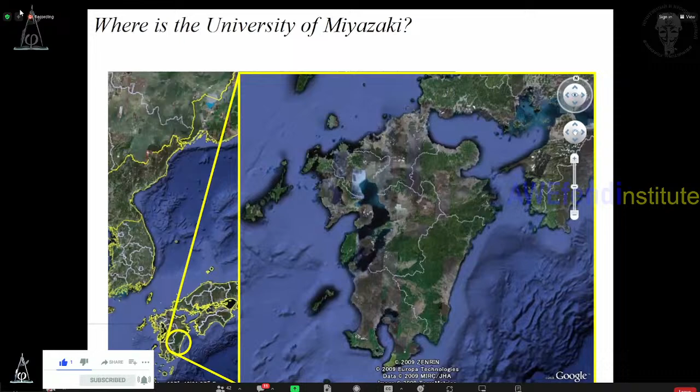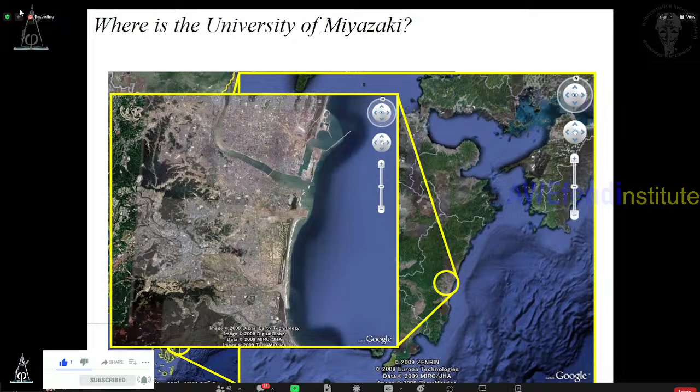I want to introduce the location of my university. Where is the University of Miyazaki? This is the Japanese islands. There is the main island, including Tokyo, and Hokkaido, the northern part of Japan. Miyazaki is on the southern island, Kyushu Island, here. There are some prefectures, and my university is located in Miyazaki prefecture, just here.

This is an aerial photo of my campus, around 10 kilometers from the city area, surrounded by nature. A very nice and comfortable campus. If you have the chance to visit Japan, please come to Miyazaki and enjoy the very nice environment.

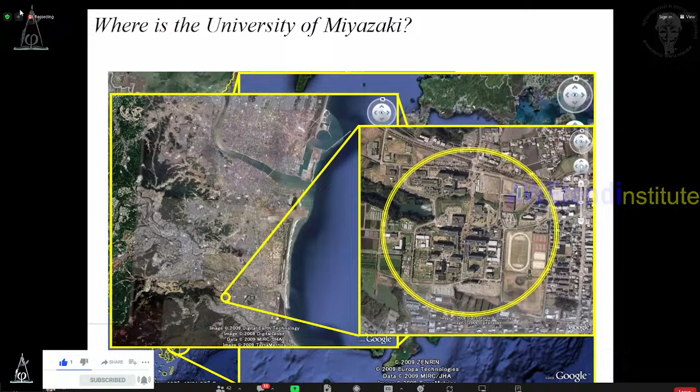Of course, many students from other universities and international universities studied in these courses. Many students from Brawijaya also studied in those courses. This is the outline of my university. If you are interested, please contact me or Dr. Nico.

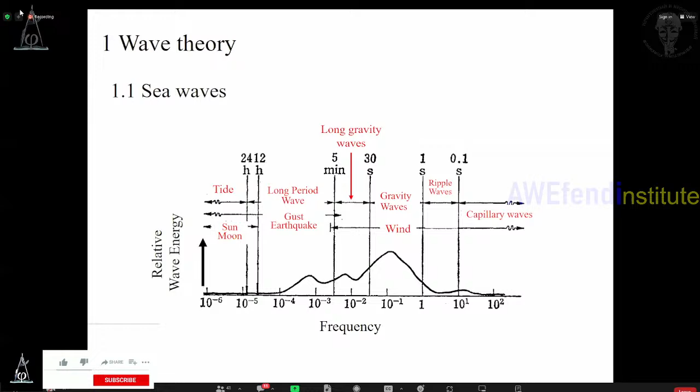Okay, before talking about the wave theory, I will show you the definition of the symbols I use in today's lecture. Sometimes I use capital H here - this is what we call wave height. And eta, this is the temporal water surface location. Capital L is the wavelength, and h is the water depth.

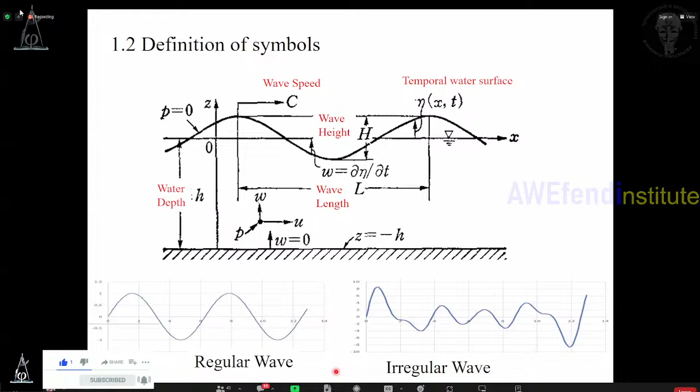Okay, at the beginning of the theory, there are some assumptions. Today I will talk about linear wave theory, and this theory includes some assumptions. One is two-dimensional phenomenon. Second is small amplitude oscillation. Third, and this is important, irrotational motion. And no viscosity and incompressible flow. The theory is based on a sinusoidal waveform, and the sea bottom is flat and impermeable. Another important assumption is constant atmospheric pressure, waves propagate without changing their form, and we neglect Coriolis force.

So, introduction of velocity potential is based on the assumption of irrotational motion. On the next slide I will talk about more detail. In this theory, we introduce the concept of velocity potential. U and W are the velocities in the X direction and Z direction. These velocities are derived from the velocity potential phi, differentiated by X or Z. This is the definition and introduction of the velocity potential.

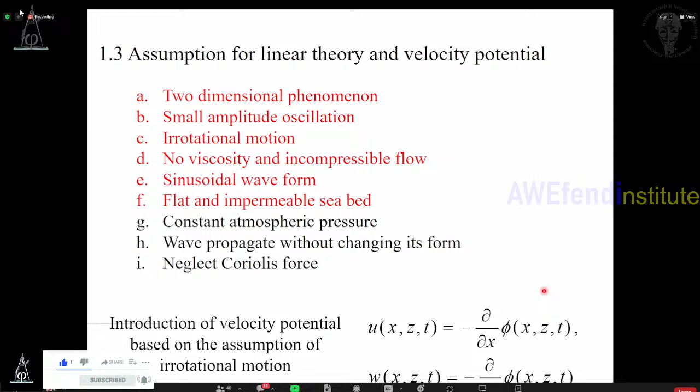Okay, then next I will talk about what's the meaning of irrotational motion. This is an image of the water particle rotation. This blue, green colored water particle is just rotating like this, clockwise rotation. This kind of rotation is generated by the flow velocity on the left-hand side and right-hand side here. The left-hand side is larger than the right-hand side, so this water particle has a clockwise rotation.

So we try to take the difference of velocity on the left-hand side and right-hand side, like this, and take a limit as delta x gets smaller and approaches zero. So we can have the derivative of w by x. We try the same thing in the horizontal direction - here is u, upper side u and lower side u. The upper side u is faster than the lower side, so the water particle rotates in the clockwise direction.

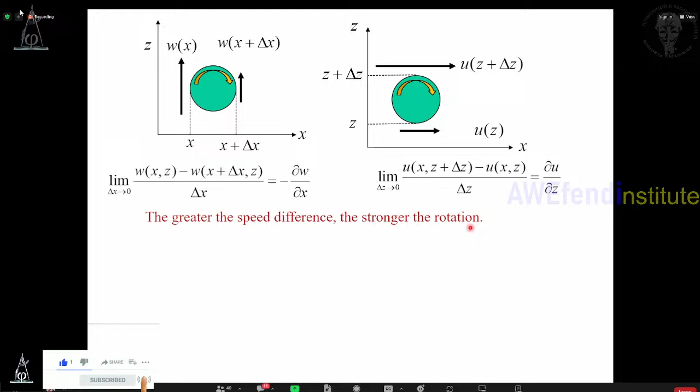So the greater the speed difference, the stronger the rotation. This is an image of the water particle rotation. That is why vorticity, the strength of the water particle rotation, the degree of strength that causes fluid particles to rotate, is the definition of vorticity.

From this definition, we can derive the vorticity like this one. Counterclockwise this part and this part. This is the vorticity. If we assume irrotational motion, this vorticity equals 0. No vorticity - this is the definition of irrotational motion. In wave theory, we use this assumption.

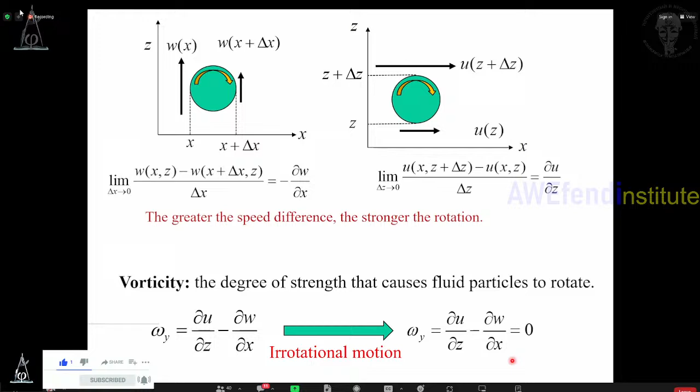Okay, maybe you can understand this one. Let's derive the following relational expression. I'll show you the previous slide.

Take the difference of z-direction velocities and divide it by delta x, and take the limit as delta x goes to 0. So this is the result of this definition.

But how can you get this relation? Can you derive from the left-hand side to the right-hand side? Can you do that? Please try this one. Maybe you can easily derive the right-hand side of this equation.

Okay, I will show you. You need to use Taylor expansion. Sorry, this is a mistake - Taylor expansion. Please correct this one, this is a mistake. On this equation, you can expand using Taylor expansion.

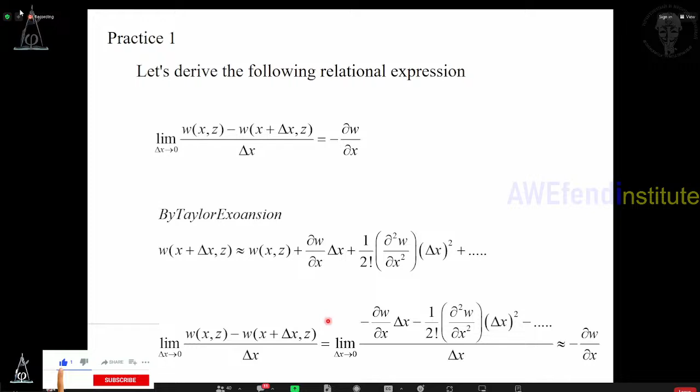Okay, next is the image of the velocity potential. This is the vorticity defined in the previous slide, and based on the assumption of irrotational motion, I showed you the result of the irrotational motion.

In this case, we introduce the velocity potential phi here and here. And when you derive the horizontal velocity, you differentiate phi by x, and also you derive the vertical direction velocity by differentiating phi by z.

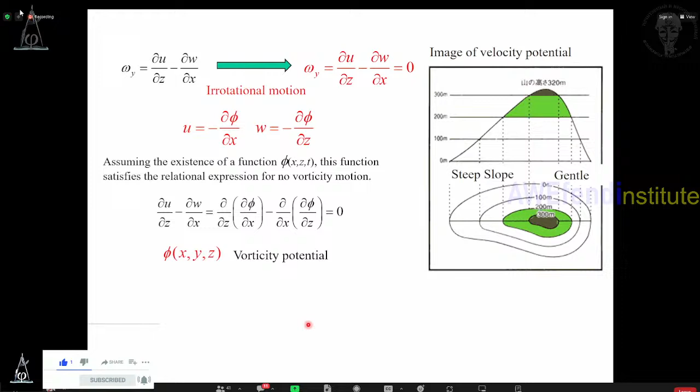If you can introduce this kind of velocity potential, we can satisfy this irrotational motion like this one. So you put this part in here and this part in here, and you can have this vorticity equal to 0. This is the image of the introduction of the velocity potential.

The image is here - here is a mountain, and the height of the mountain is a kind of the intensity of the velocity potential. This part and this part mean the slope of the mountain, in the x direction or z direction. If you have a steep slope, the velocity becomes higher, and if you have a gentle slope, the velocity becomes lower. This is the image of the velocity potential.

And the advantages of introducing velocity potential - there are advantages when you talk about wave theory, because U and W can be expressed by the velocity potential phi. That is why you can reduce the number of unknowns to solve. If we don't introduce the velocity potential, we have to solve U, W, P - there are 3 unknown parameters.

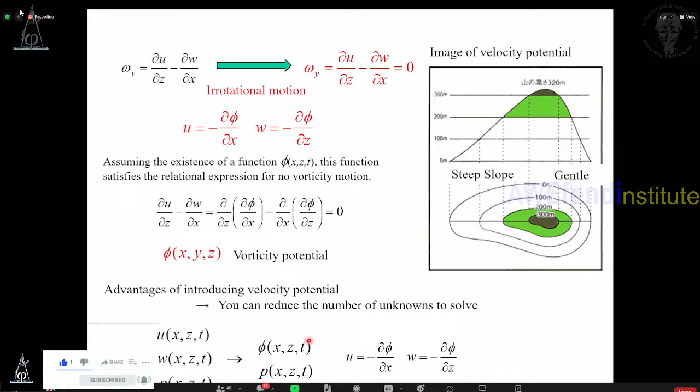Next, we try to talk about the governing equation. Maybe you already understand this one - the continuity equation. In fluid dynamics, this is a basic understanding, one of the governing equations. This is a small water particle, a small water compartment here, with dx, dz as the size of the compartment here.

Some amount of water goes into this compartment and some amount of water goes out from this compartment. Inflow from the left-hand side or lower side, and outflow from the upper side or right-hand side. The size of the compartment is dx and dz.

When you write the mass of water inflow, it is rho u dz, so outflow can be expressed using Taylor expansion like this one. In the vertical direction, the mass of inflow is rho w dx, so you will have the outflow like this one with Taylor expansion.

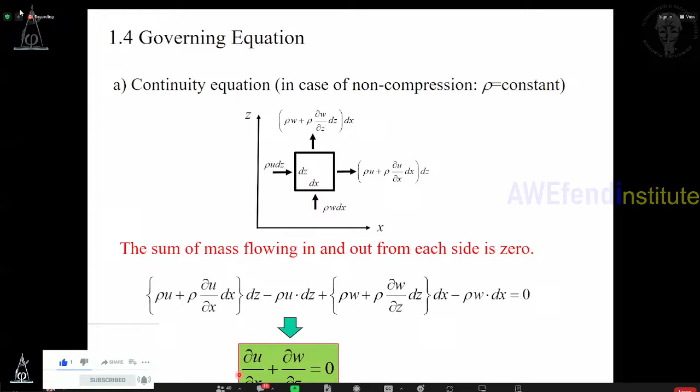Based on the concept of the continuity equation, the sum of the mass flowing in and flowing out from each side equals zero. This can be written as this equation: outflow, inflow, outflow, inflow, the sum of flow in and out equals zero. From this, you can have the continuity equation like this one. Maybe you already know this one.

Next is the momentum equation, what we call Euler's equation of motion. In our assumption, as I mentioned before, we cannot consider the tangential force tau. We neglect this force and only consider the pressure and gravity.

First, we understand the external forces acting on the fluid element. On the left-hand side, pressure P acts on this face with area dA, so PdA is the external force on the left-hand side. The right-hand side also has an external force, expressed using Taylor expansion. This part is the gravity force acting in the minus z direction.

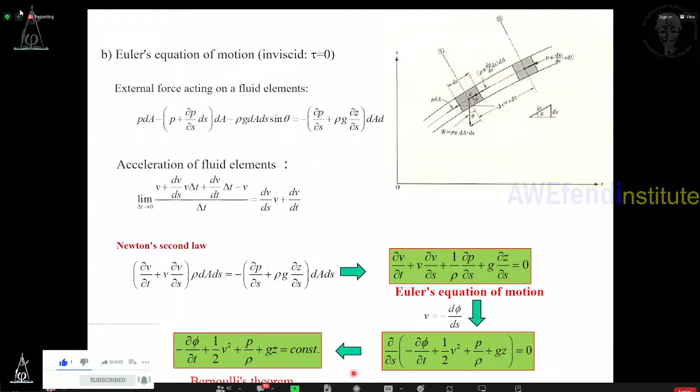This is a theoretical treatment. We derived the continuity equation like this one, and we introduce the velocity potentials U and W like this. You put U here and W here, and you get this equation related to the velocity potential phi. This is the famous Laplace equation, which can be solved by applying boundary conditions.

In this theory, we can use this waveform because wave motion is sinusoidal. Eta is the temporal water surface location, representing the temporal sea surface form, expressed by a sinusoidal function - here we use the cosine function. K and sigma are the wave number and angular frequency, related to wavelength L and wave period T.

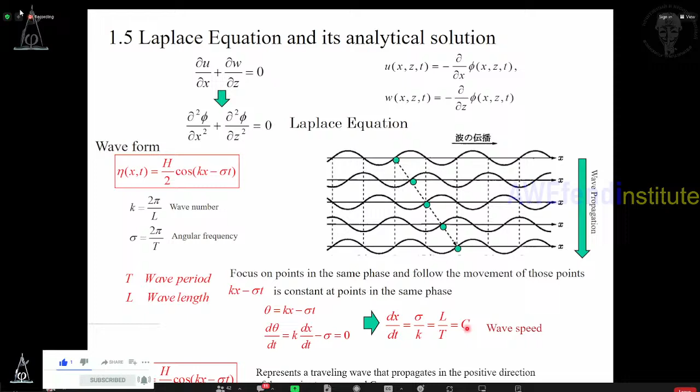Okay, if you take this form, not kx minus sigma t, but kx plus sigma t, what is the meaning of this form? Okay. In the same manner as the previous slide, theta equals kx plus sigma t, and you take a derivative of theta by t. In this case, it has a negative value. Here is a minus sign. This means that when you use this kind of expression for the waveform, the waves propagate to the negative direction of the x-axis.

So by understanding these waveforms, we try to solve the Laplace equation by applying the boundary conditions. This is the governing equation, Laplace equation. Okay. And so we check the boundary conditions one by one. The boundary condition on the sea bottom. The sea bottom is impermeable. Impermeable means the velocity in z direction equals 0. In another expression, using the velocity potential, this means the impermeable condition. Velocity in z direction equals 0.

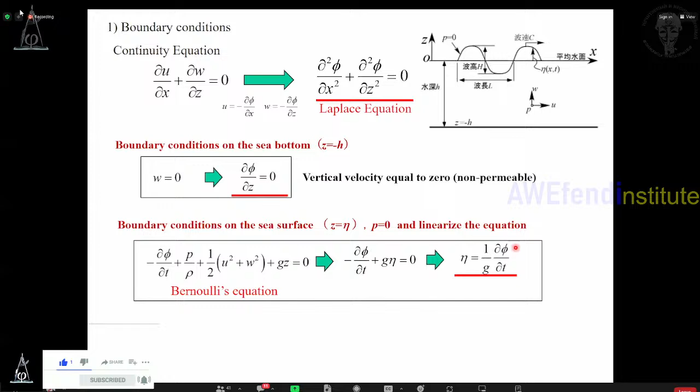Okay, z equals eta, and phi is the velocity potential. So from this, the water surface elevation, eta, can be expressed as this form. And another water surface boundary condition: on the water surface, the vertical velocity w equals the speed of the water surface motion. The water surface elevation moves up and down, and this is equal to the water particle velocity on the water surface. So these are the boundary conditions on the water surface.

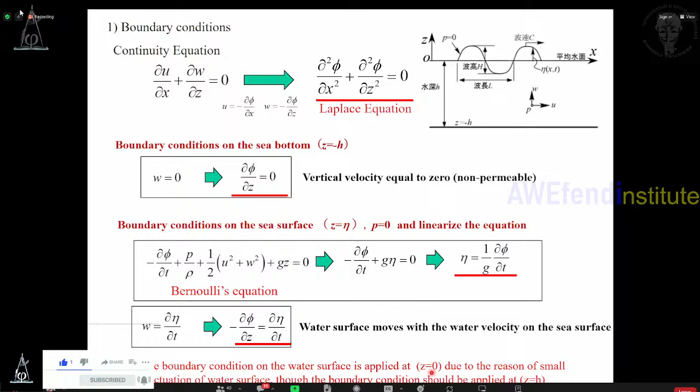The boundary condition on the water surface is applied at z equals 0 due to the small fluctuation of the water surface. Sorry, this is eta, a mistake. Actually speaking, the location of the water surface is eta, but now we are assuming the water surface fluctuation is small near z equals 0. So that is why we apply the boundary condition at z equals 0.

Okay, just try to solve the problem. This is the waveform I mentioned before, traveling in the x positive direction. And this is the boundary condition on the water surface. From these two relations, we can assume the velocity potential like this one, because the water surface eta has a cosine function, and when you take the derivative of phi by t it equals a cosine function, so you can assume this form. So please put phi in here. You can get the above equation.

In this equation, f(z) is an arbitrary function that becomes 1 at z equals 0. So we have to find the form of this part. We put this form in the Laplace equation here. You will get this form. This is a second order linear differential equation. This is a famous equation. And you can solve this one by assuming this form. A and B are the integral constants. Okay?

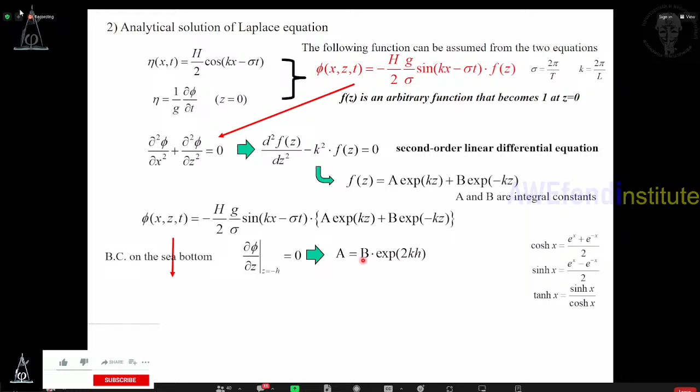So this red color form can be expressed as this one. And on the boundary condition on the sea bottom, I mentioned before here, so you can have the relationship between A and B. A equals B times exponential of 2kh. And you put this relation in the previous equation, you will have this one.

And in this expression, we use this kind of relation: cosine hyperbolic and sine hyperbolic. These are the hyperbolic functions defined as the exponential relation, like this one. Also, you apply another sea surface boundary condition. So from this, you can decide the form of B. So finally, A and B are decided, and we have the final form of the velocity potential like this one.

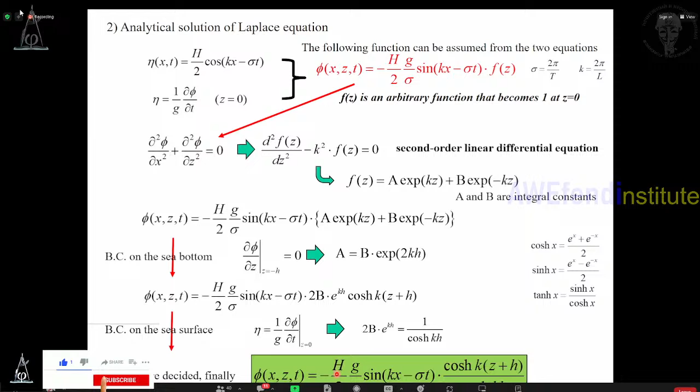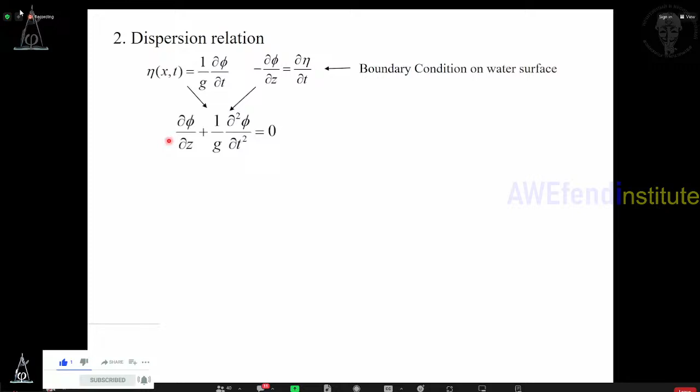Okay. This is a solution of the Laplace equation. So next we talk about the dispersion relation using this solution. These two are the boundary conditions on the water surface. From these, you put this part in here, so you will have this differential equation. I'm putting this solution in here, phi, and z equals 0 because these are the conditions on the water surface.

So from this, you will have this important relation. Square of sigma, sigma is angular frequency, equals g times k times hyperbolic tangent kh. k is the wave number and h is the water depth.

This is a famous characteristic of the hyperbolic function. Cosine hyperbolic and sine hyperbolic go to infinity when kh goes to larger values, but when kh goes to 0, cosine hyperbolic takes 1, and sine hyperbolic goes to kh. And tangent hyperbolic goes to 1 when kh goes to larger values, and when kh goes to 0, it approaches kh.

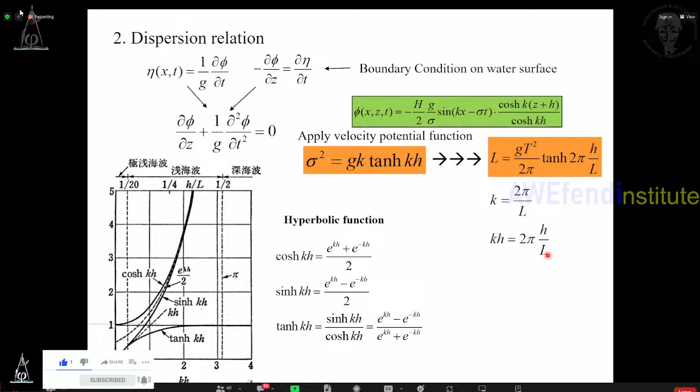So k is the wave number and kh is the relative water depth, because h is the water depth and L is the wavelength. From these characteristics of the hyperbolic function, when we talk about the deep water wave, when kh goes to infinity, this form goes to this one. The wavelength is directly related to the square of the wave period. So in deep water cases, this form never includes the water depth h. And the wave speed equals 1.56 times T from this equation. This is the assumption of deep water waves, kh goes to infinity.

On the other hand, kh goes to 0. This means shallow water wave. So tangent hyperbolic goes to kh. That is why here goes to kh. So the wavelength equals wave period times square root of gh. In this form, shallow water waves include the water depth h. And c, the wave propagating speed, is derived from the square root of g times h. This means that the wave speed is directly related to the water depth.

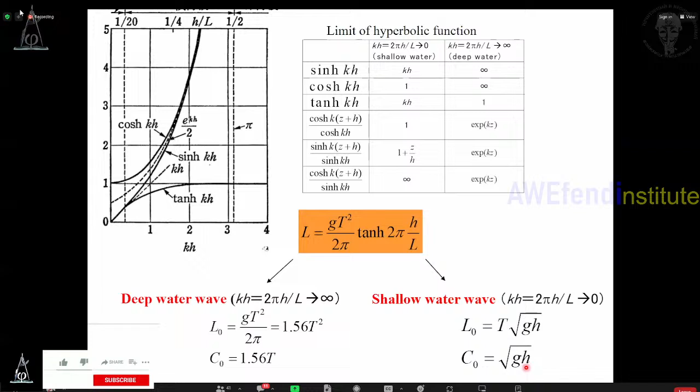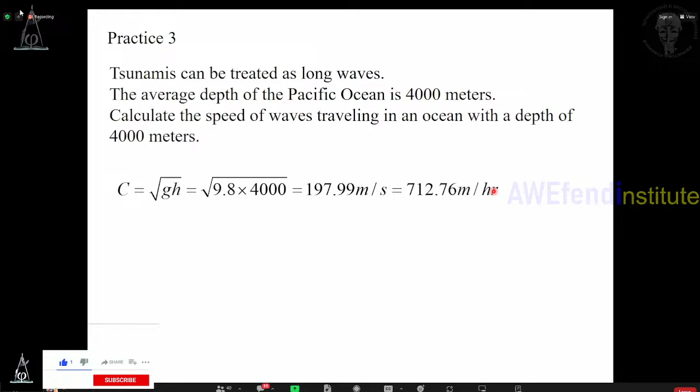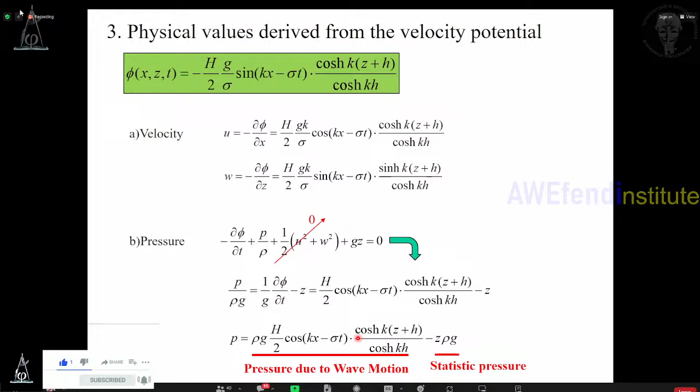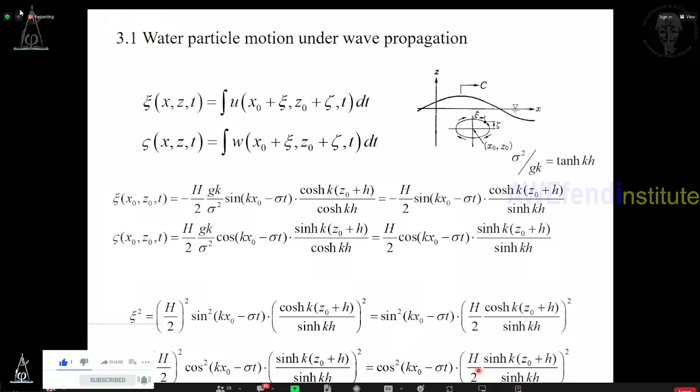From this, maybe you understand the square of xi equals the square of amplitude times the square of the sine function and the square of this part related to the z direction. And this is summarized like this one for the square of xi, and for the square of zeta, in the same manner as xi, you can summarize it like this one. So from these two relations, using the relation that square of sine plus square of cosine equals 1, the square of xi part and square of zeta part equals 1. A and B are defined like this.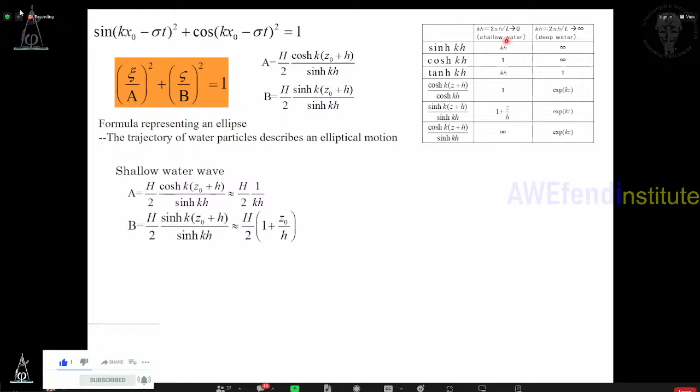So this is a formula representing an ellipse. Okay, this means that the trajectory of the water particle is described as an elliptical motion. Elliptical motion. In the shallow water case, you take this assumption, and in the case of deep water, you assume this assumption. So A and B can be expressed like this in case of shallow water, and A and B are also expressed as this form in case of deep water waves.

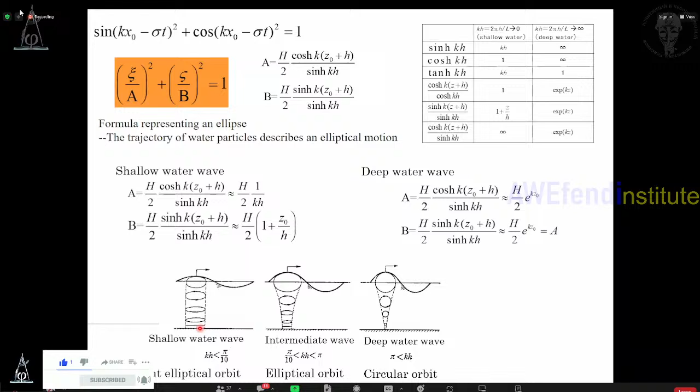So when we draw these relations in the figure, the shallow water motion is like this one. It has an elliptical motion, but the size of the horizontal axis is almost the same from the water surface to the bottom, because this is a shallow water case and the water depth is very small relative to the wavelength.

But on the other hand, in the deep water case, it has a circular orbit like this one, because A is expressed like this one and B is expressed like this one. This is the same. A equals B. Horizontal axis and vertical axis have the same value. This means that it is not an ellipse but circular. Okay. These are the water motions under the wave propagation.

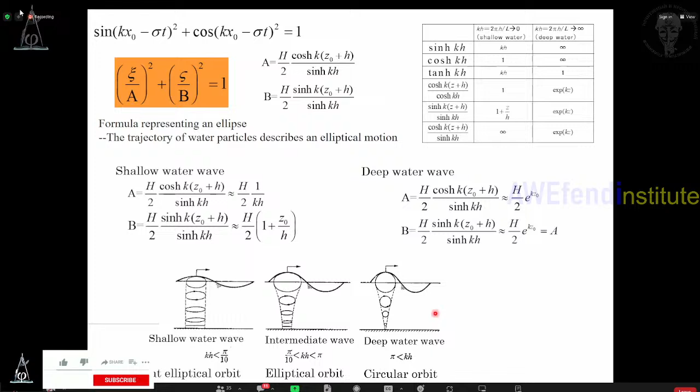Okay. So this is totally different from the river flow. In case of river flow, water particles flow from upstream to downstream. But in case of wave motion, water particles never move with the waveform. Water particles never move with the waveform. The particle is just moving in an elliptical orbit or circular orbit, never propagating with the wave motion. This is a large difference between river flow and wave propagation.

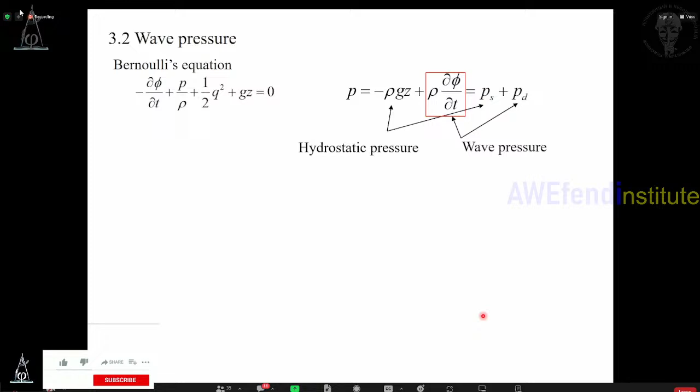From this relation, we can measure the water surface by measuring the wave pressure. This is a waveform here. And we measure water pressure at a certain depth, Z equals H1. This equation can be expressed like this. And this part is the same as this relation, so it can be expressed as eta. This means that the water surface fluctuation eta is obtained from the wave pressure value. When you measure the wave pressure P, from this value you can get the water surface displacement eta.

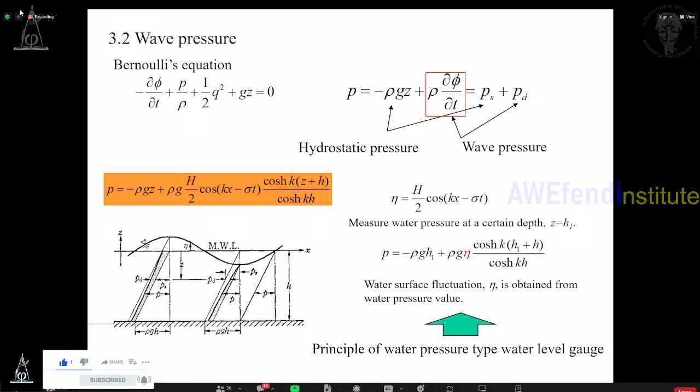Okay, today I talked for more than 60 minutes. And last, I want to introduce my recent research. I'm now interested in the characteristics of wave run-up height and wind action. Characteristics of wave run-up height and the wind action. This is my recent research topic.

Of course, the seawall was designed properly, but this kind of flooding happened. So I assumed that the current design method is not enough because it doesn't include the effect of the wind. That is why I started this kind of research.

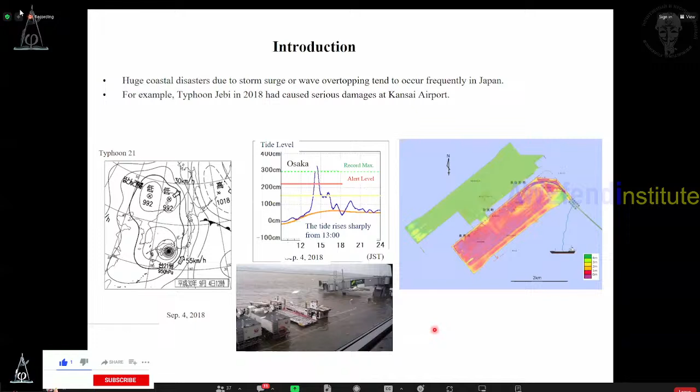Many researchers have investigated the characteristics of the wave run-up height, but such flooding happens frequently. I think that coastal disasters caused by high waves usually occur under strong wind, and unexpected wave run-up may increase damage. So I assumed that the wind effect is larger than we expected.

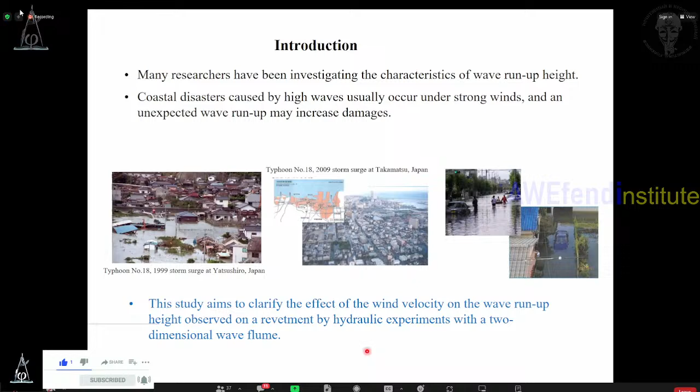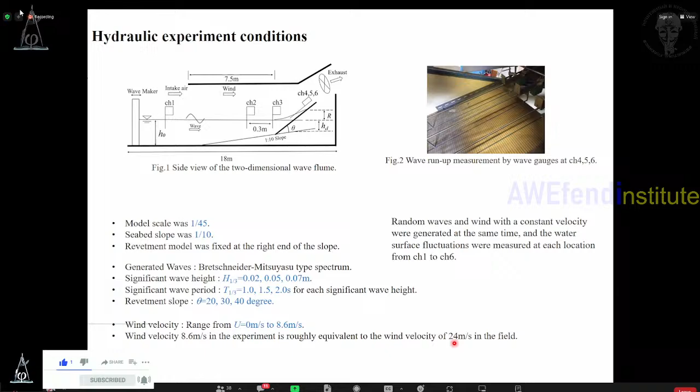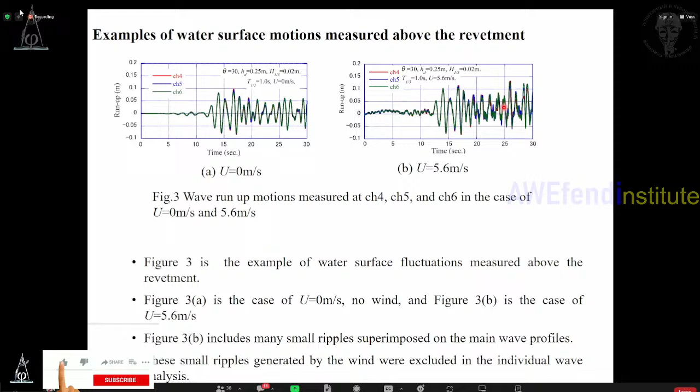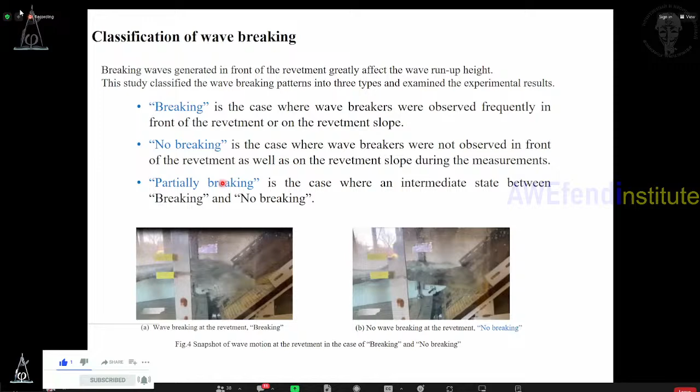Breaking conditions are very important when we discuss the characteristics of run-up. But this result says that blowing wind increases the wave run-up height, in some cases twice the run-up height compared with no wind. From these results, we confirmed that blowing wind is very important when we discuss wave run-up.

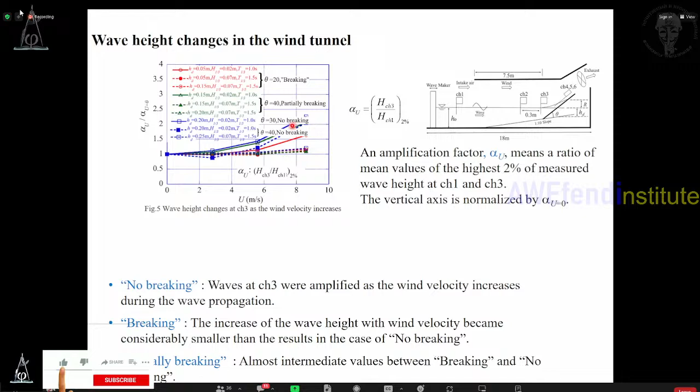There are some more slides, but today I will conclude my lecture. Firstly, I talked about the basics of wave motion based on wave theory, and after that, about my recent research topics related to the design of the wave run-up height including the wind velocity.